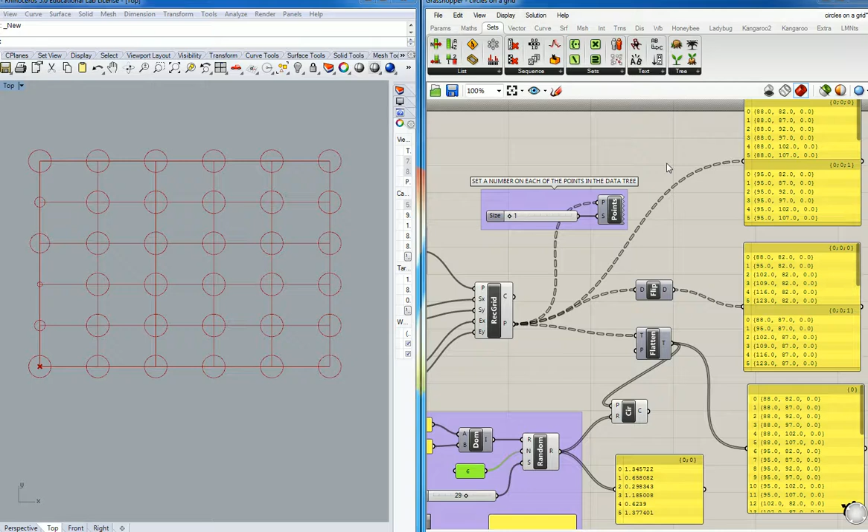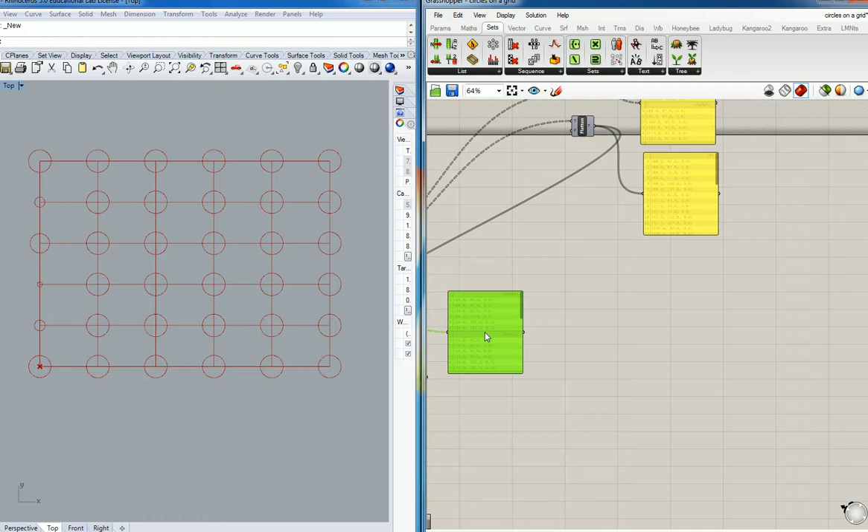So we're going to finish this definition off finally, I know you guys are tired of this one. What I'm going to do is take these two things which were extraneous to the definition and move them out of the way. I'll put these up this way, and take the one we're using and bring it down here. Remember, we fed this one in temporarily, so I'm going to refeed my circles from here.

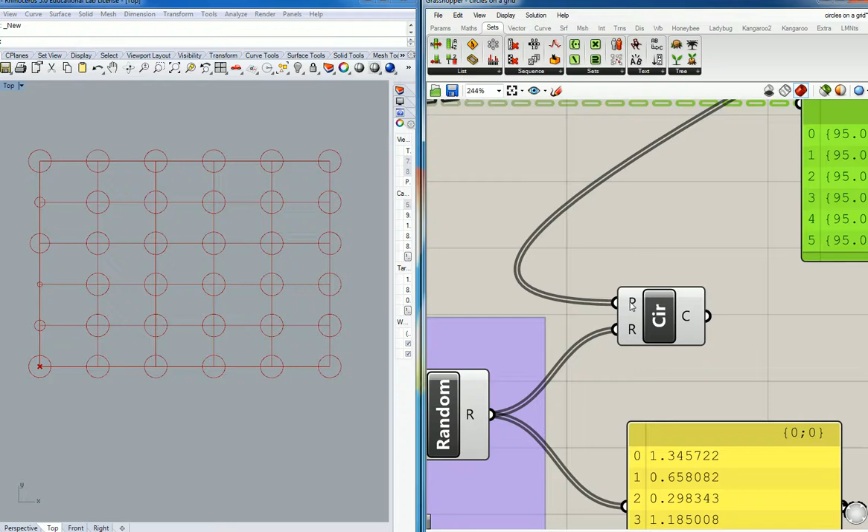Wait, nope, Control Z. What's going on? Oh, I need to disconnect that, never mind. Let me scroll in here, disconnect, flatten tree. We don't want that in there, we just want our original one. So I'll feed that into there, and it gives us back those circles.

Now, what we need to do is analyze how many total points there are. Actually, I made a mistake — what we're going to do is use the flattened one, not this one. I want the flattened one so it creates a sequential pattern rather than a repeating pattern. So I take that all back, move you back up there, and bring the flattened one down. That's the one we're going to use.

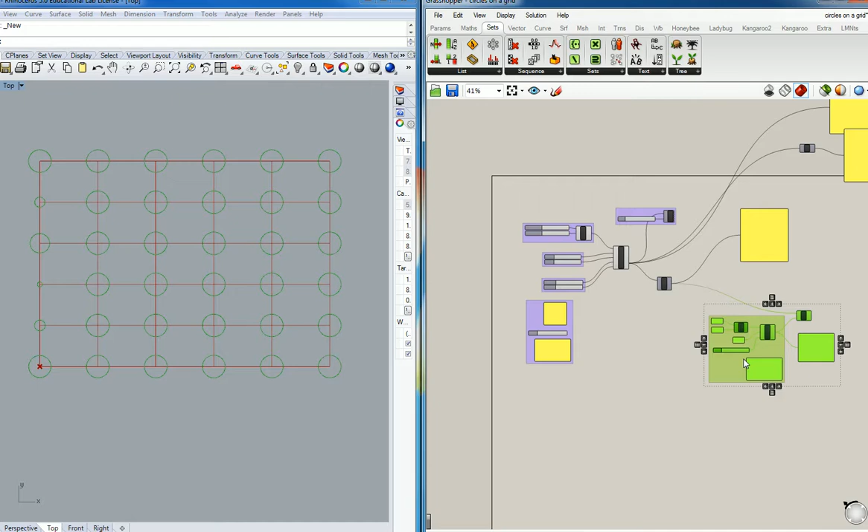I'm going to take the outfeed from flatten and feed it in. Actually, I'll feed that into there, and then disconnect the other one. Now, for this to have a better flow, I'm going to move the circles and the random generator, and move all this stuff over this way, reorganizing so you'll be able to follow it better.

So right here, what we did is we took the data, we flattened it, so it's just a sequential set of numbers, one after the next, and it's going to get fed into the circles. No problem so far? All right.

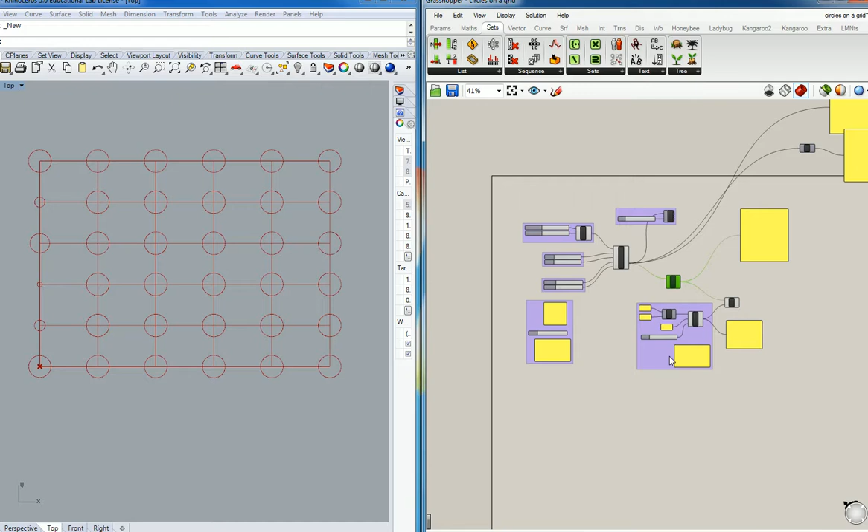Notice that the total length of this is 6 items, 0 through 5, and it's stopped. One thing we need to know so we can figure out how many values we want is the total list length. Notice this is a list, not a tree, so there's a component called list length. Where is it? List length, there it is.

List length, if you wanted to find it, press Control Alt, click here — it's under Sets and Lists. So what we're going to do is feed the stuff coming out of the flattened tree into list length. I'm going to hold down the Shift key, and that's going to tell me how many total items there are. Let's drop a panel right here.

And right now there are 36 items in that list. So that's what we're going to need to do — take the pattern and repeat it through 36.

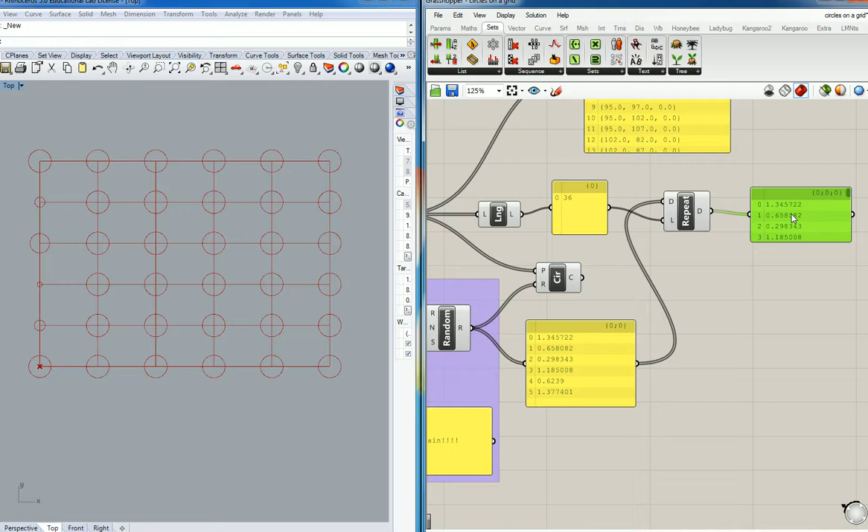So the last thing we have to do is feed this into the circles rather than the flattened list into the circles. I'm going to disconnect the flattened list, move the circle component over to here, and feed that into there. And it errored.